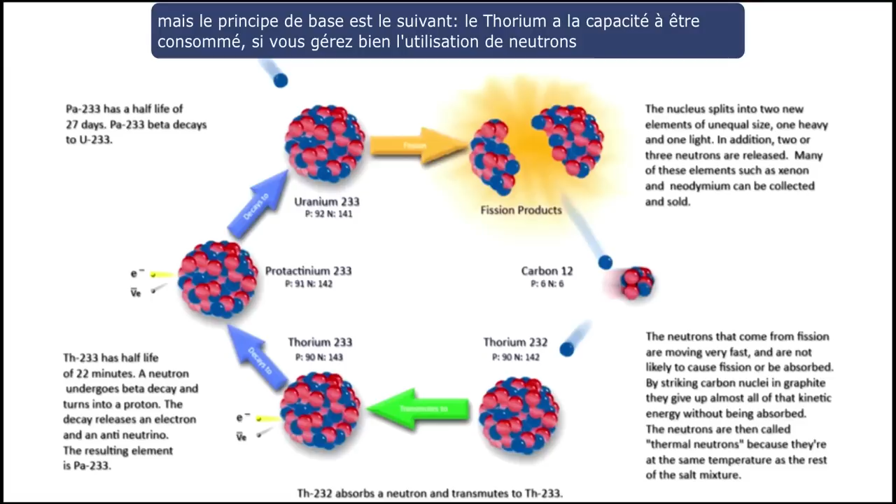If you are prudent with your neutron budget, you can continue to consume thorium so long as you have a fissile starter, of which uranium-233 is the best.

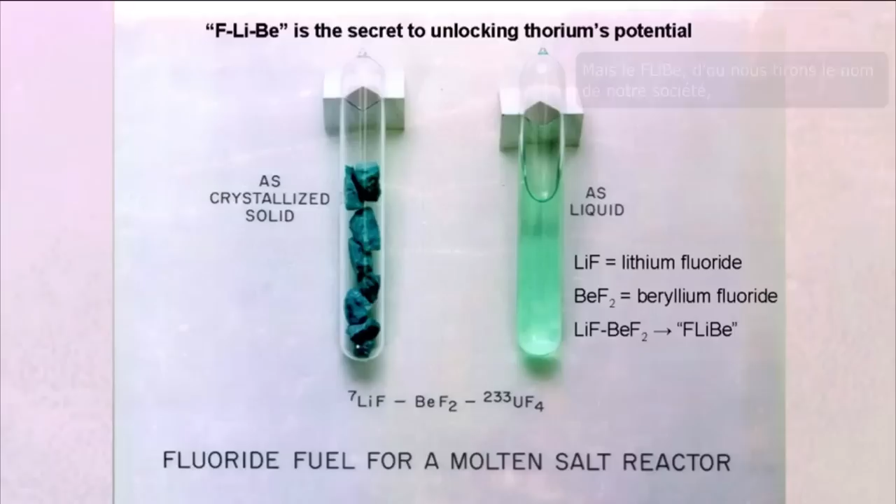Thorium, of course, is not uncommon, and there are particular places in the United States where it is exceptionally common. But Flibe, which is where we derive the name of our company, is really the secret to unlocking thorium's potential.

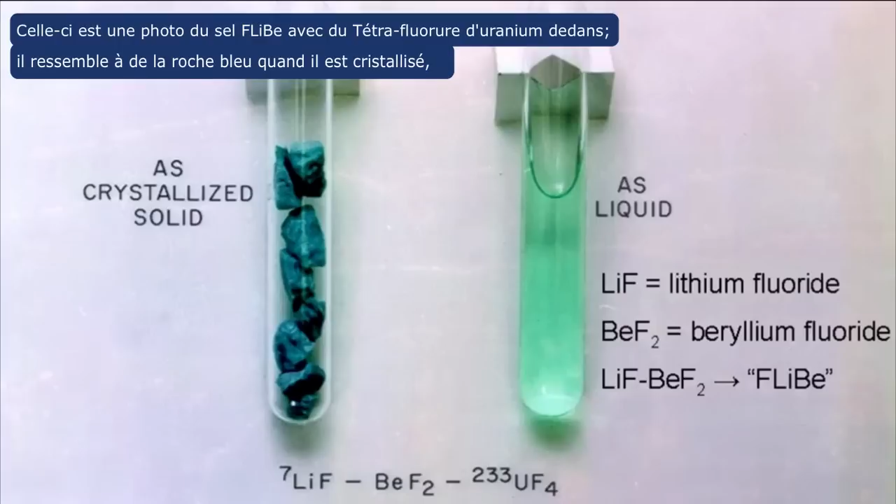I was very glad that Raluca was talking a little bit about Flibe and the experiments they're doing at UC Berkeley. This is a picture of Flibe with uranium tetrafluoride in it. It looks like blue rocks when it's crystallized. It looks like Palmolive when it's liquid. Flows like water - very hot, but chemically stable.

This was taken back at Oak Ridge a long time ago. Nuclear reactors based on Flibe were really built and operated. The molten salt reactor experiment was successfully operated using Flibe salts for 4 years at Oak Ridge National Labs.

Much of the Flibe is still there. A couple of years ago, we tried to see if we could get a hold of it before they threw it away, but Oak Ridge has now taken possession of it, as long as it's in good hands. I just didn't want to get thrown away.

How do we use this thing? Let me walk you through our plans to utilize thorium in a Flibe reactor. This is not the way the core really looks - this is a cartoon to make things simple.

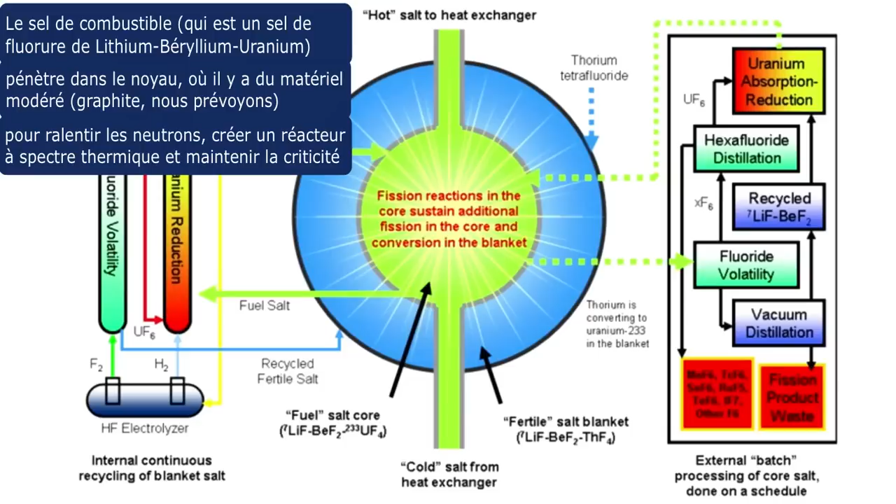The fuel salt, which is a lithium, beryllium, uranium fluoride salt, enters the core region where there is moderator material, graphite, we're anticipating, to slow down the neutrons, create a thermal spectrum reactor, and to sustain criticality. Now, as that core fluid moves out of the reactor, it's hot and fission stops.

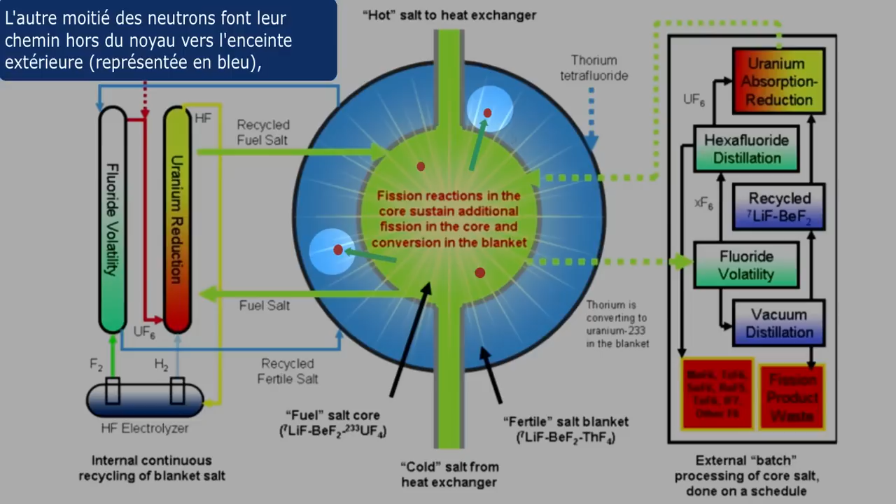About half the neutrons in the core are sustaining the criticality of the reactor. What I mean by that is one fission is causing another fission. That's the basic definition of criticality. About the other half of the neutrons are making their way out of the core into this blanket region represented in blue, and that's where the magic happens with thorium.

This is a Flibe salt, lithium, beryllium, thorium fluoride. Thorium's great at absorbing neutrons, it's great at absorbing gammas, and it's just what we want to have absorb those neutrons so we can make new fuel.

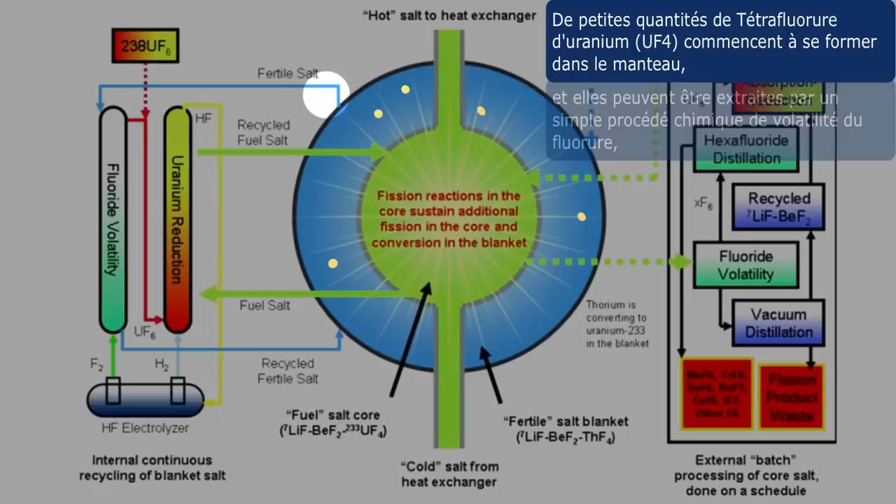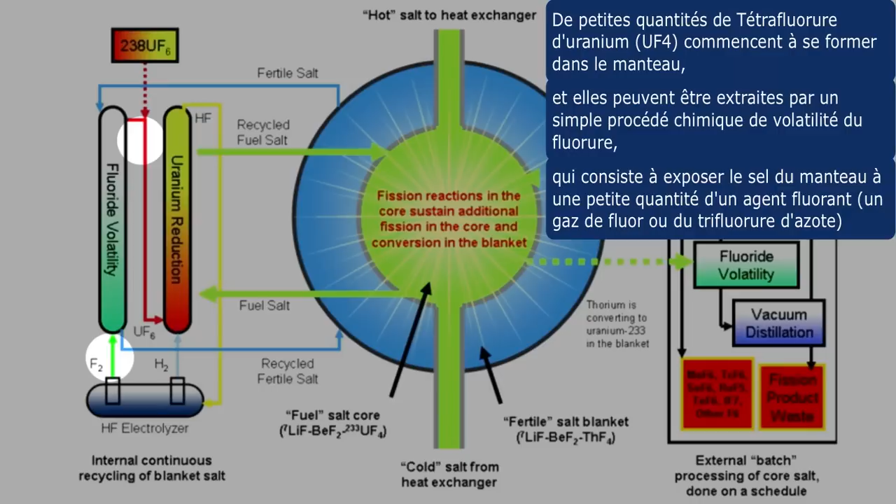Small amounts of uranium tetrafluoride will begin to form in the blanket, and they can be extracted through a simple chemical process of fluoride volatility. This is where you expose the blanket salt to a small amount of a fluorinating agent, either a fluorine gas, perhaps nitrogen trifluoride. The basic principle is, because thorium is tetravalent, and only tetravalent, and uranium has multiple valent states, that's a very easy chemical way to separate it.

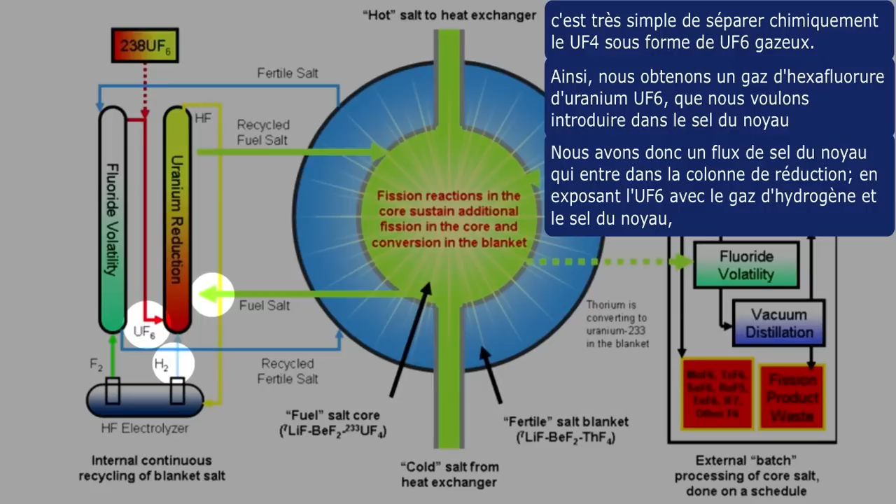So out will come uranium hexafluoride as a gas, and then you want to introduce it into the fuel salt. So you have a stream of fuel salt that will enter the reduction column. By exposing UF6, hydrogen gas, and fuel salt together, you can get the hydrogen to steal two of those fluorines from the UF6, reducing the UF6 back to UF4, which is now in solution and goes back in the core.

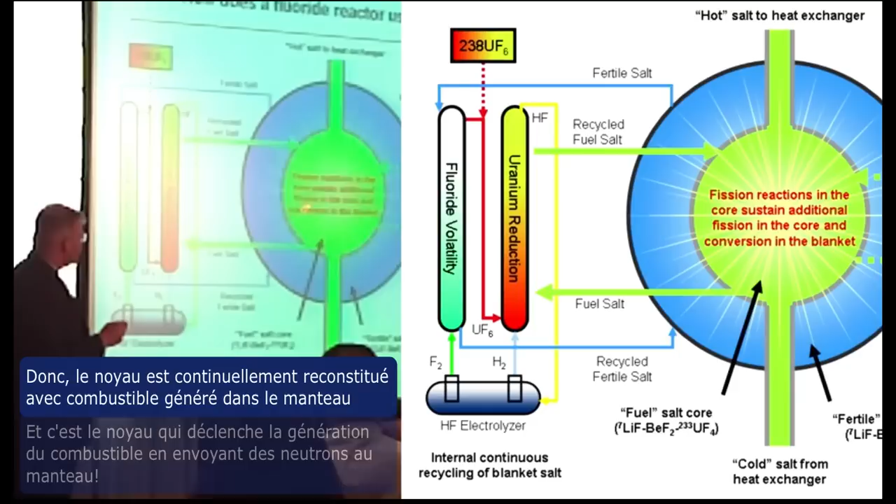So the core is being continuously refueled from the fuel that is being generated in the blanket. In turn, the core is generating new fuel by neutron absorption in the blanket. Another great thing about this blanket is the fact that it's basically your primary neutron shield.

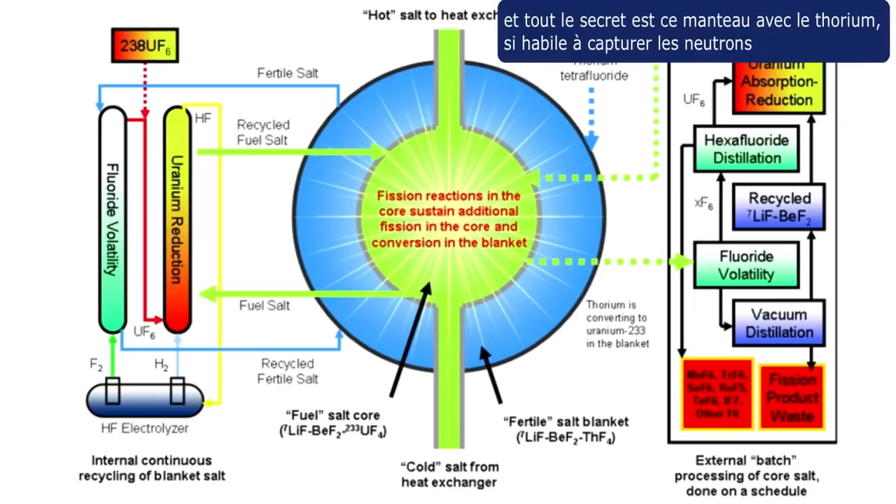A two-fluid reactor becomes a very scalable reactor in size. You can build them big, you can build them small, and the whole secret is that thorium blanket, so good at capturing neutrons. The hydrogen fluoride you produce in this can then be electrolyzed to regenerate your initial component.

So this is how we move fuel from the blanket into the core salt. A little bit of mention has been made to an emergency denaturing system. If for some reason we need to trash the isotopics of the core, we can do that very quickly. I would just as soon keep U-238 out of the core because I don't want to make plutonium. But if we need to do emergency denaturing, we can.

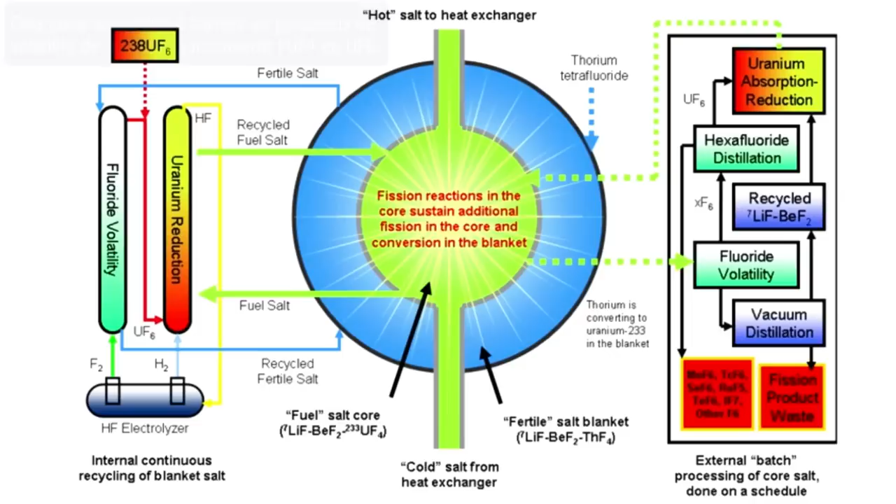Okay, in the core, we're sustaining these fission reactions. We're producing fission products. Perhaps periodically, perhaps continuously, we need to reprocess this core salt. That also takes place through a fluoride volatility process that will convert UF4 to UF6. We separate out the different hexafluorides. We put UF6 back into the core.

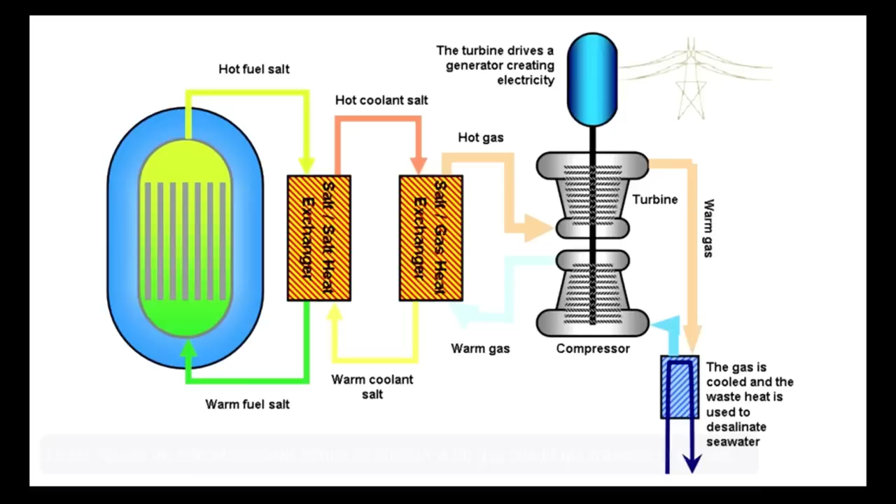All right, zooming out, so to speak, my favorite part, the mechanical engineering. Hot salt comes out of the core. It gives up its heat in a heat exchanger to a coolant salt. It could be bare Flibe, it could be FLiNaK, different salt possibilities. And then that gives up its heat to a hot gas that runs through.

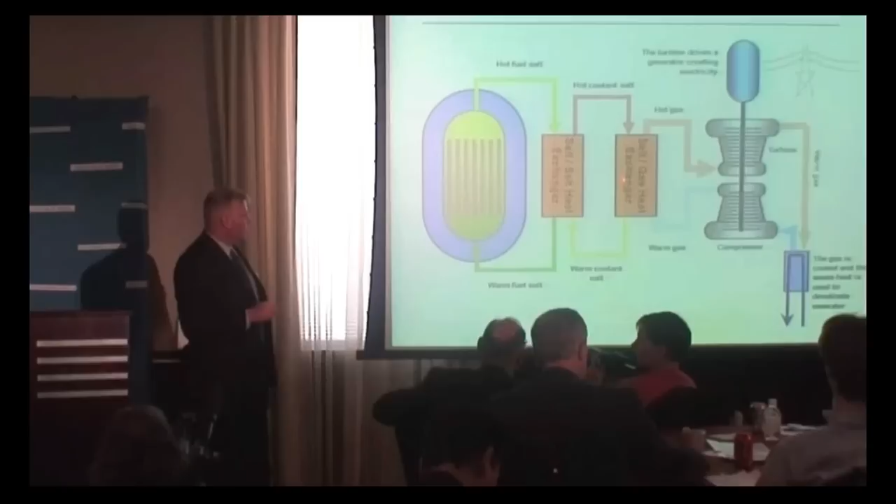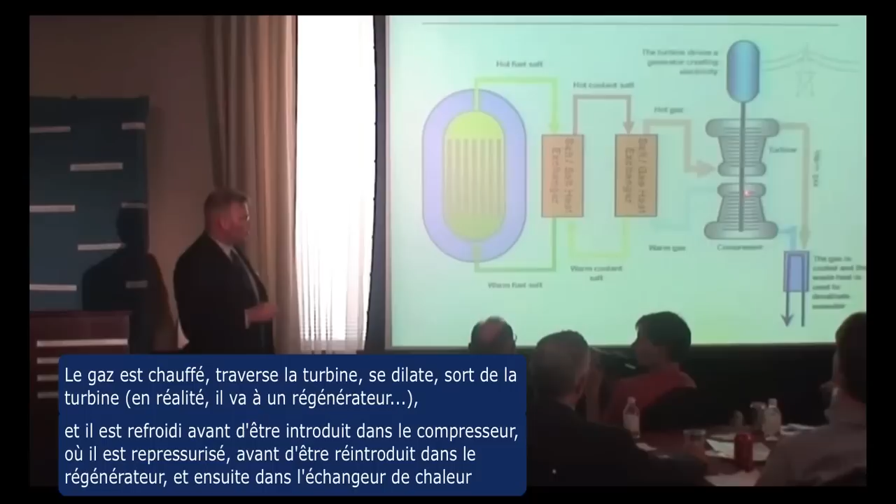This is an extremely simplified version of our gas turbine. In reality, it's probably got multiple stages and regenerators and so forth, but this is a super simple version. The gas is heated, it runs through the turbine, it's expanded, the gas emerges from the turbine, goes into a regenerator, and then is cooled in a gas cooler before being introduced into the compressor. It is then repressurized and introduced again back into the regenerator and then into the heater.

This spinning turbine, about half the power it makes turns the compressor, the other half turns the generator, producing power for the grid. The significance of the gas turbine is we can hit high efficiencies with a gas turbine.

Water is not a good working fluid, a steam turbine, for this kind of technology. This kind of technology is going to be operating up in the 1000 K temperature range, way beyond where we go with water. That's what enables you to hit up in that 50% conversion efficiency.

That reduces the amount of heat you're going to have to reject to the environment. Even more significantly, the heat you are going to reject to the environment can then be used for desalinization. When we condense steam right now at a relatively low temperature, we can't use that effectively for desalinization. As we cool a gas, as it drops from about 100 C to about 30 C, we can drive a desalinization system with that.

And Dr. Per Peterson's done some great work looking at how we couple gas turbines to desalinization systems. Another compelling product that can be generated from this technology.

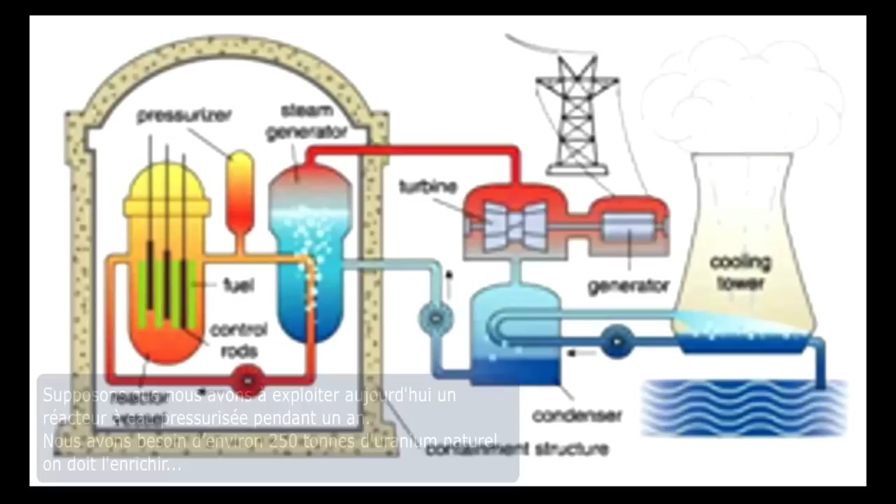But mainly, we're out to make electricity, we're out to run the grid. When we want to run a pressurized water reactor today for a year, it takes about 250 tons of natural uranium.

We enrich it, we put it in the reactor, we expose it for a while. We burn up most of the U-235 in it, make some plutonium, make some fission products, but most of it's still unburned fuel. We take it out because the fuel has sustained radiation damage. It's cracking, it's swelling, it's not going to stay in there any longer. Plus, it's not breeding enough fissile to continue its consumption. We don't make more fuel than we consume.

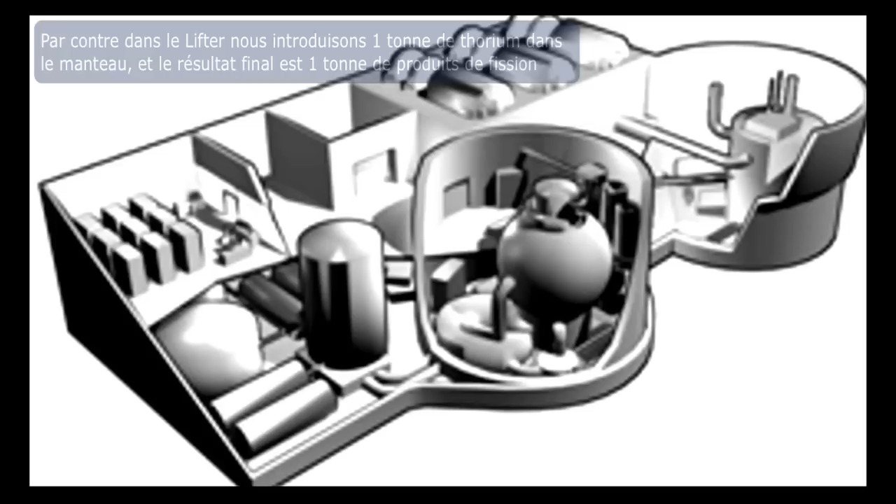On the other hand, in a LFTR, we introduce thorium into the blanket, as I mentioned earlier, and the end product is a ton of fission products. We keep the transuranics and the actinides out of the waste stream, and that's very significant from a waste disposal perspective because that's what drives your waste disposal criteria. These fission products are decaying quickly, not even within 10 years, within just a few months. Two of the most important ones, xenon and neodymium, are both stable and can be partitioned and sold.

At NASA, we love xenon because we use it to explore the outer solar system and run ion engines on it. When I made this chart, I said, well, this is the real waste. Actually, I've come to think, in a lot of ways, the remaining fission products could still be extremely useful.

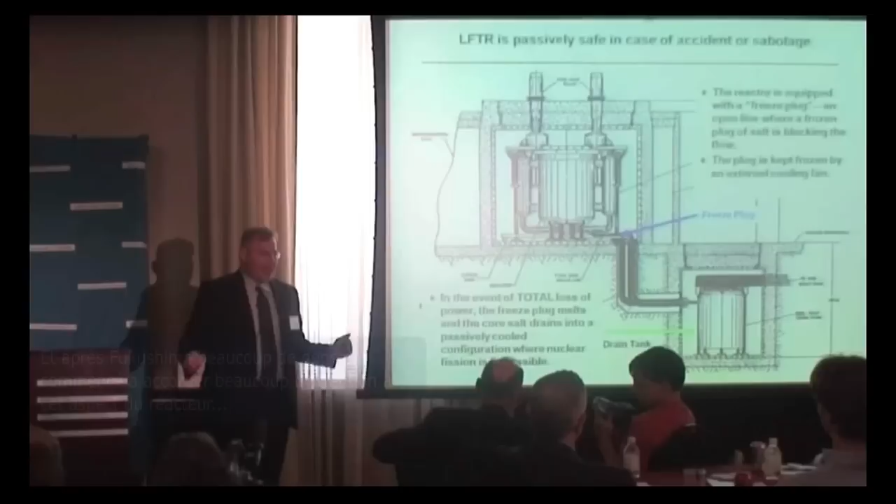We've been talking about passive safety in the LFTR community for a very long time. After Fukushima, a lot of people started to pay much greater attention to this aspect of the reactor, but we are no Johnny-come-lately to this. In fact, this was all come up with long before I was ever even born. This was demonstrated back in the 60s with the molten salt reactor experiment.

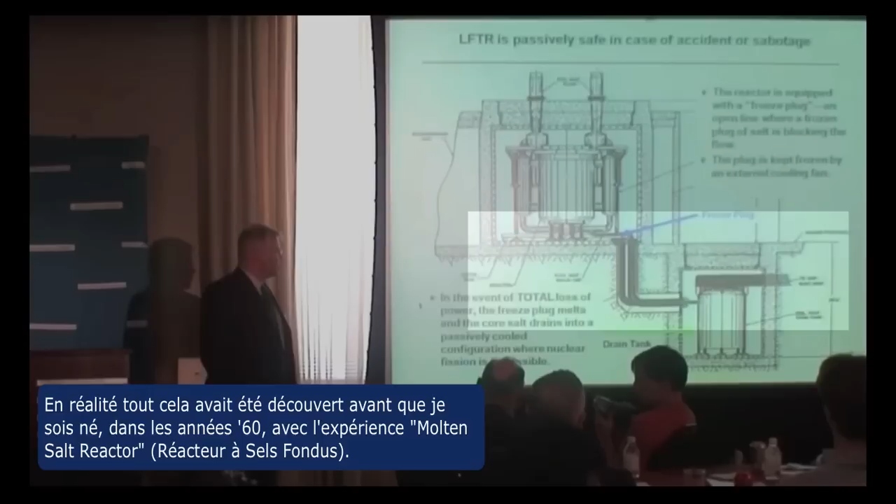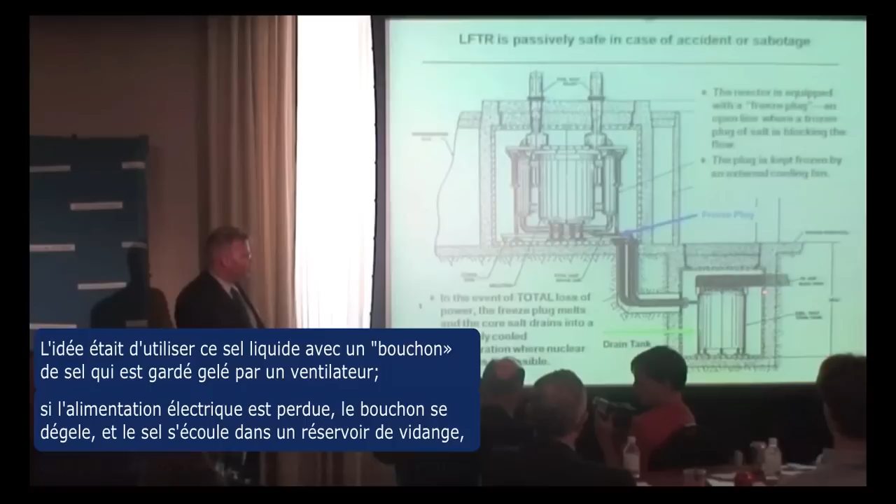The whole idea of using this liquid salt, having a freeze plug where a blower would freeze a plug of salt in the line. If you lose all power, that freeze plug will melt, the salt will drain into a drain tank where now passive approach to decay heat removal, you're maximizing heat transfer to the environment, whereas you're trying to minimize it in this reactor.

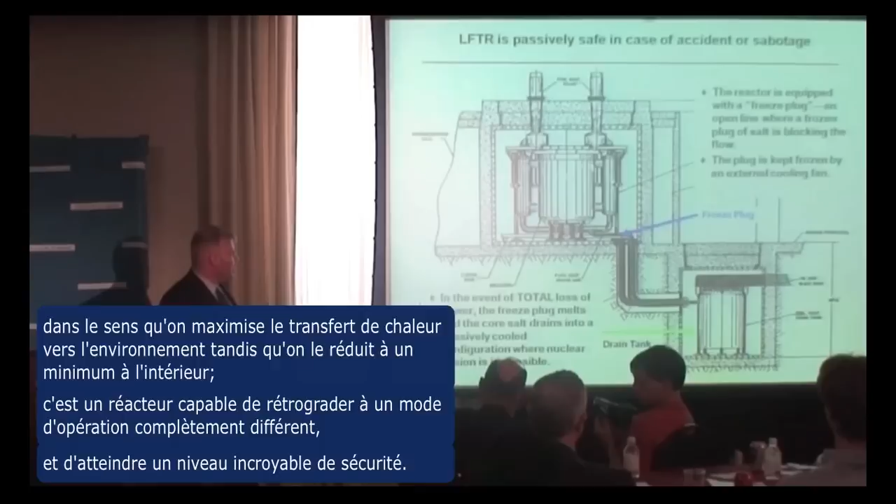It's a reactor that can downshift fundamentally to a completely different mode and achieve a staggeringly impressive level of safety, even if there's physical damage to the reactor. See that catch pan? Everything is there to direct the fuel into the drain tank and into a passively cooled configuration. We can't say enough about this feature, and it is unique to liquid-fueled reactors, and particularly unique to liquid-fueled reactors that have elevated melting temperatures.

So even though we have to get the salt hot before it melts, that's the very feature that makes the freeze plug and drain tank work. So there's goods and bads with all of this.

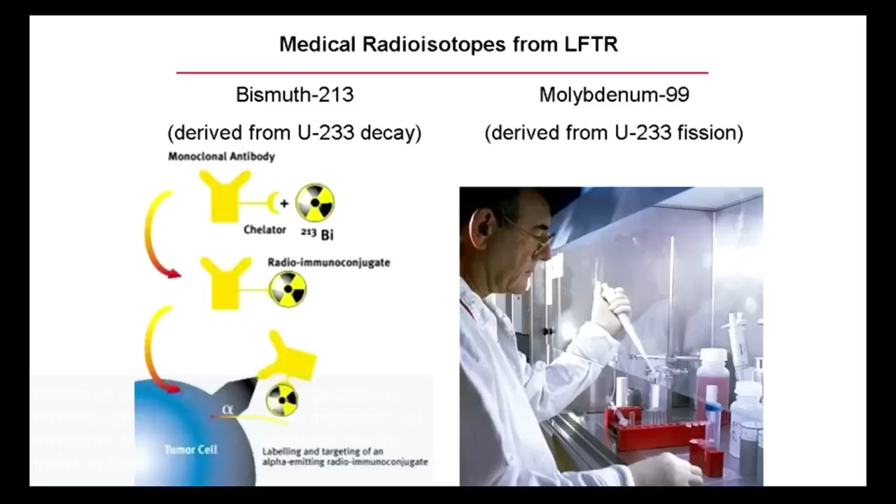We talk about medical radioisotopes for a little bit because this is an important aspect. I've mentioned molybdenum-99. Let me talk about bismuth-213. There's 4 natural decay chains of alpha-emitting radioisotopes. One starts with U-238, U-235, Thorium-232, and then there's one that's extinct because it has no long-lived precursors on it. It was there in the supernova billions of years ago. It's gone now, and it is on the U-233 decay chain.

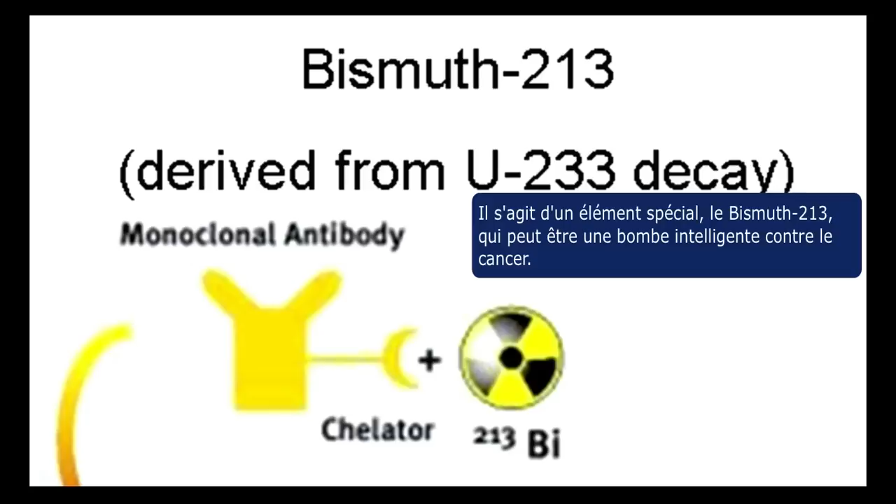There is a special product on there, bismuth-213, that could be a smart bomb against cancer. They attach the bismuth-213 to an antibody. It seeks out the cancer cell, binds to it, and that alpha emitter delivers a knockout blow to the cancer cell. This is a very, very targeted application of radiopharmaceuticals.

I know we have 2 radiation oncologists in the room today, so forgive me if I'm not describing this quite right, but I sometimes even lay in bed thinking, if my kid had leukemia, how hard would I be working on getting this therapy ready for them to save lives? And if it's that important, why aren't I going full bore on it right now?

This is a great technique against dispersed cancers. And again, I hope I don't get out of my lane here. But from what I understand, if you've got a dispersed cancer, this is the approach you want to take to go after it. And there's only one way to get this material.

There's a uranium-233 inventory at Oak Ridge. We need it to start LFTRs, and we also need it to go and extract this life-saving medical radioisotope.

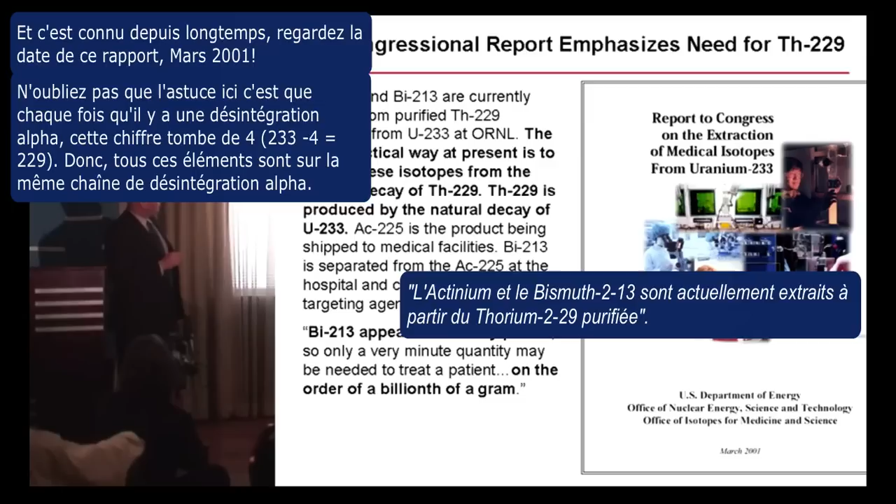So remember, bismuth-213. People have known about it for a long time. Look at the time on this report, March 2001. Actinium and bismuth-213 are currently extracted from purified thorium-229. And the real trick here is to remember, every time you have an alpha decay, that number goes down by 4. So 233 minus 4 is 229. So all these guys are on the same decay chain.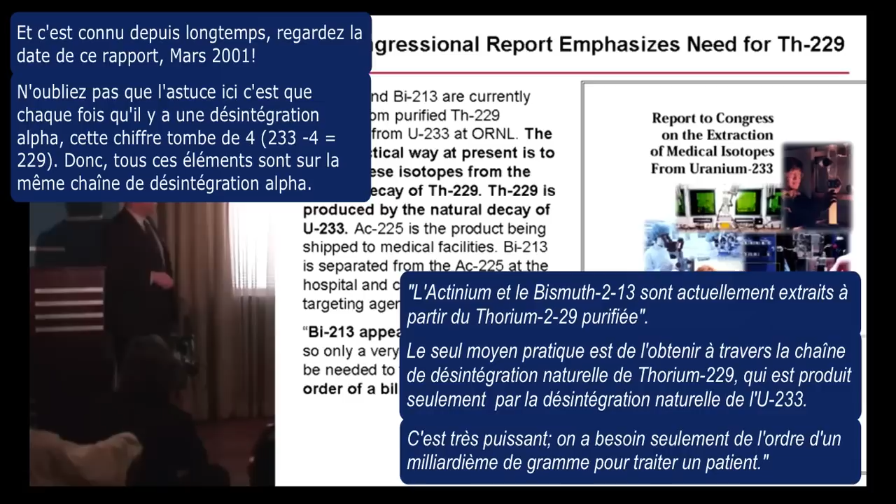The only practical way is to get this from the natural decay of thorium-229, and it is only produced from the natural decay of uranium-233. It's very potent. We only need on the order of a billionth of a gram to treat a patient. We need to go get this stuff, and we will do it in the course of making LFTR a reality.

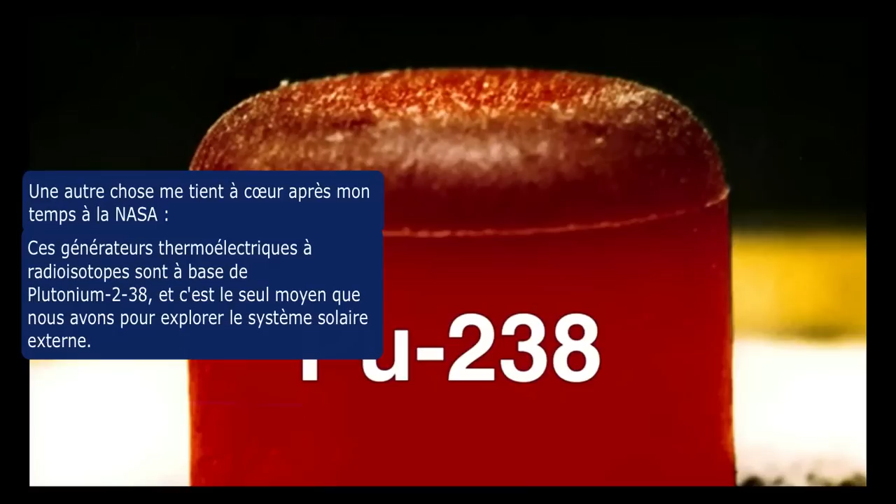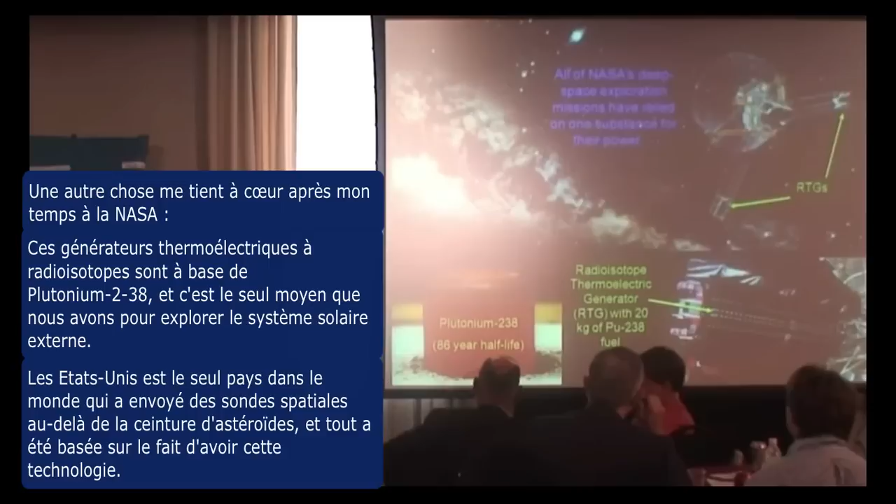Another thing near and dear to my heart after my time at NASA: these radioisotope thermoelectric generators are based on plutonium-238, and this is the only way we've been able to explore the outer solar system. The United States is unique, the only country in the world that has sent space probes beyond the asteroid belt, and it's all been based on having this technology.

Short answer, we're out of the stuff. It's gone, we've used it all up. The Russians used to sell us some, but they've sold us all their inventory. It's gone. NASA's got billions of dollars of deep space missions hinging on having enough of this stuff to run the batteries that let the spacecraft call home.

We will be able to make this in the LFTR. If you've heard us say we burn up 99% of the fuel and there's 1% left, that 1% left is this stuff. And it's worth almost as much as the stuff we burn up.

Again, this is recognized in National Research Council reports: we've got to restart domestic production of plutonium-238. The United States has delayed action. The situation has become critical, no pun intended. Continued inaction will exacerbate the magnitude and impact of these shortfalls, causing elimination of missions until a source of plutonium-238 is developed. This was written a couple years ago. This is happening right now. NASA is cutting back on their plans to explore deep space because they don't have this stuff.

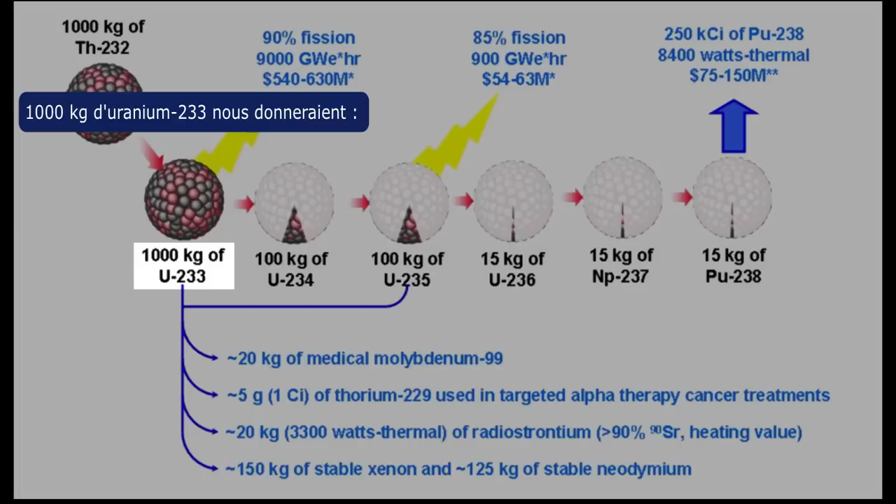So what could we generate from our cornucopia of material from the LFTR? 1,000 kilograms of uranium-233 would be worth hundreds of millions of dollars of electrical sales as we fission and generate electricity. Even as we peter this out to the point where 1,000 kilograms ends up as 15 kilograms of plutonium-238, NASA will love that. They'll go bananas if we can get 15 kilograms of plutonium-238 for them.

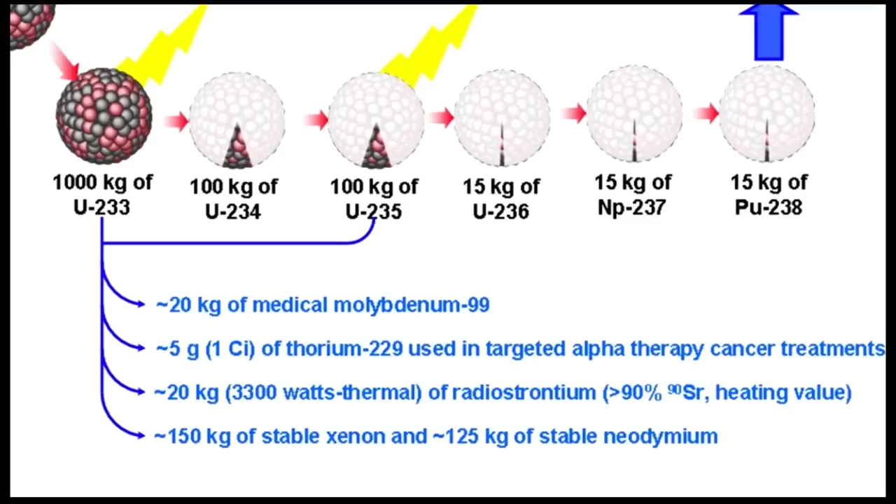Along the way, we'll make 20 kilograms of medical molybdenum-99, thorium-229 for targeted alpha therapy treatments, 20 kilograms of radiostrontium that can be used in remote heating units, 150 kilograms of stable xenon, and 125 kilograms of stable neodymium. These aren't worth all that much money, a couple hundred thousand dollars, but they'll help pay for the 1,000 kilograms of thorium that did all this. So out of this marvelous machine comes a variety of different revenue streams, each with a community that is literally begging for them.

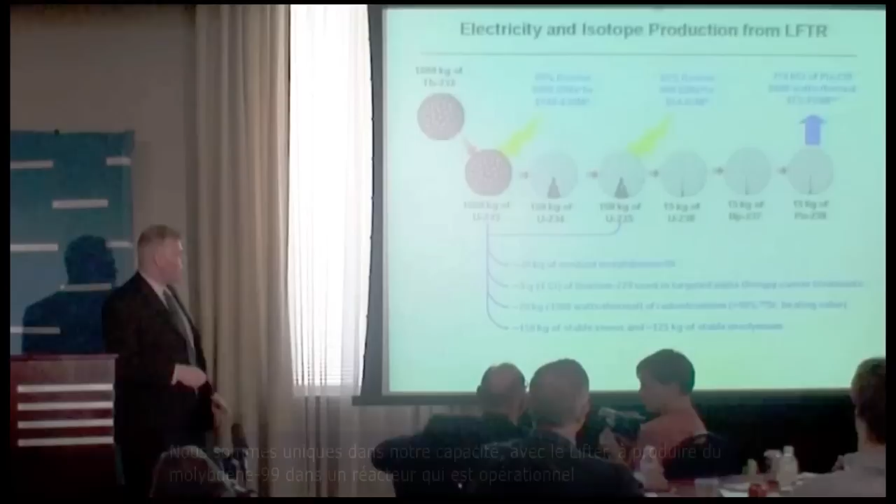We are unique in our ability with the LFTR to make molybdenum-99 in an operating power reactor. A solid fuel reactor would have to shut down and try to take its fuel out of the process to do it. We don't have to do that. We can make it while we're operating.

We also don't have to make plutonium-238 in the expensive way. Until very recently, I was Chief Nuclear Technologist at Teledyne Brown Engineering. Had a fantastic time there, really loved working with them, and really loved getting the paycheck every 2 weeks too. That was great.

So it was a big moment to go out and do Flibe. Previous to that, I was on assignment from NASA to the Army Space and Missile Defense Command for 2 years. I had the privilege of meeting people like Colonel Roege and others of our men and women in uniform. I also gained a lot of insight into the challenges our troops face, not only in combat regions, but also in remote sites like Kwajalein Atoll and Fort Greely, Alaska. We have a real need for remote power systems, and Colonel Roege did such a good job describing that, I won't go into any more detail.

At Marshall Space Flight Center, I've been working on a nuclear engineering degree. My very long-suffering professor is here in the audience - thank you, sir, I will graduate one of these days. Previous to that, I got my aerospace engineering degree from Georgia Tech.

I want to introduce my partner, Kirk Dorius. We were both graduates of Utah State University and friends there, and he went on to pursue a lucrative career in the law profession. So briefly...

We're not done. Oh, we're not done. So briefly, Kirk and I have known each other for about 20 years.